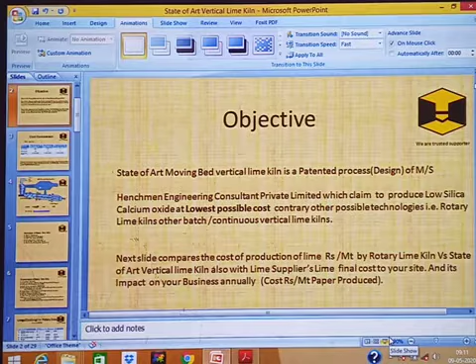Here is the cost comparison of lime produced by three different technologies. If you are producing lime by your own rotary lime kiln, the cost of production will be 11,606 rupees. If you are purchasing from a supplier it will cost 6,550 rupees. And if you are producing lime by the state of art moving bed vertical lime kiln, it will cost you only 2,515 rupees.

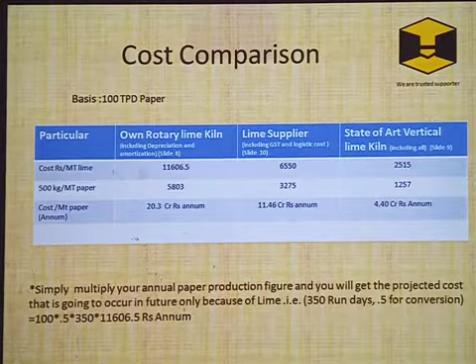So we have made some approximate projections for 100 ton per day paper production. We all know that every ton of paper production requires 500 kg of lime. So the cost contribution in paper manufacturing due to lime, by rotary lime kiln, will be 5,803 rupees, by supplier's lime it will be 3,275 rupees, and by state of art vertical lime kiln it will be only 1,257 rupees.

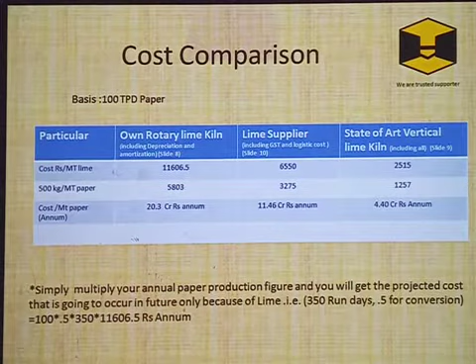So annually, a paper mill producing 100 ton paper per day will cost 20.3 crore rupees due to lime only, using rotary kiln lime. And if using supplier's lime, it will be 11.46 crore, and by state of art vertical lime kiln it will be 4.40 crore. There is a huge difference in the cost by all the three lime kilns.

A rotary lime kiln looks like this. Here is the old version, and it is popular since the last 50 years. But we are not going to discuss too much about rotary lime kiln operation, heat losses through radiation or flue gases. If you want to know all the losses and why it is costing so much, you should go through our video on the channel linked here.

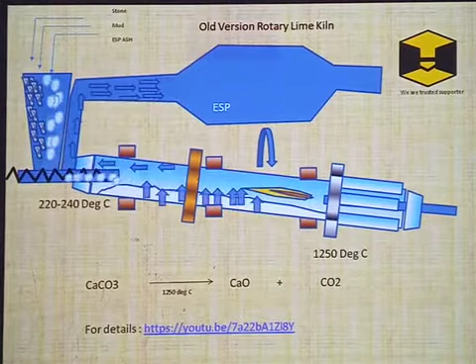Here is the costing part. In rotary lime kiln, basically there are two types of makeup: one is limestone, one is purchased lime. Some mills use both types of makeup simultaneously. Every ton of lime requires 0.1 metric ton of makeup lime as limestone, and purchased lime requires 0.33 ton per metric ton of lime.

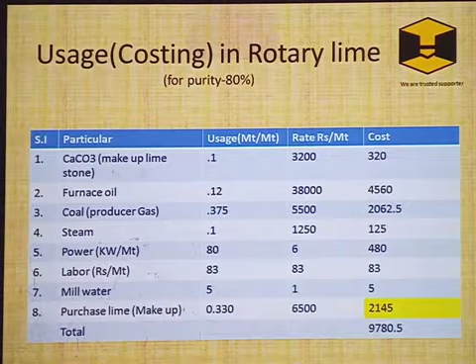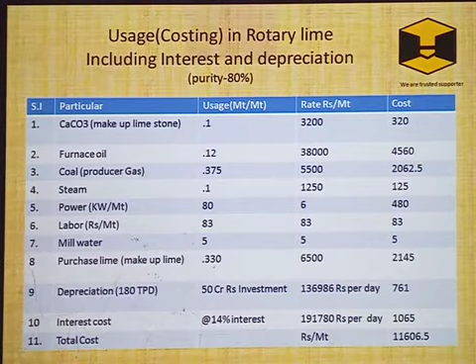So the costing becomes totally 9,780 rupees, and mind that this cost is without any depreciation and interest. So if one mill has installed a 180 ton per day lime kiln, it has invested 50 crore rupees, whose depreciation becomes 761 rupees per metric ton. Similarly, interest cost is 1,065 rupees. So the costing becomes 11,606 rupees per metric ton of lime produced.

Here the supplier lime kiln uses. Suppliers are ready to sell their lime at the cost of 3,800 rupees, and including GST it becomes 4,000, and after logistic cost to your mill it becomes 6,550 rupees. It may vary by 100 or 200 rupees, but it will be near about the same. So why they are costing only 3,800 rupees, we have to study this more precisely and wisely.

Lime suppliers usually erect their lime kiln proximate to raw material so that they can enjoy bulk purchasing of raw material. So producing 80% purity lime, they require only 1.55 metric ton of limestone per metric ton of lime produced, and theoretical energy required is only 3.1 gigajoule per metric ton. It must also be noted that the lime they are utilizing is 99% dry as well as 99% pure. So theoretical energy is 3.1 gigajoule, but typically it is around 4. This means they are using coal at 226 kg per metric ton, which amounts to 1,130 rupees. So overall the cost becomes 1,951 rupees, which is very low.

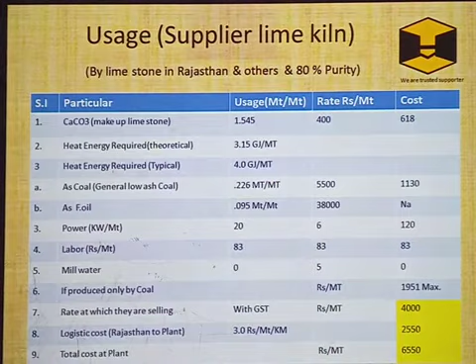So we will discuss this in the later slide. Let's see the uses of all the things in the state of art vertical lime kiln. State of art vertical lime kiln claims to produce 85% purity lime at the lowest possible cost.

So makeup lime requirement will be 0.2 ton per metric ton, and heat energy theoretically required will be 3.15 gigajoule per metric ton, but typically it requires 4.2 gigajoule per metric ton, which means 250 kg of coal as producer gas per metric ton.

There is also an option to produce this lime by furnace oil, but furnace oil itself is a costly item, which makes the whole process costly. So lime will be produced only through the producer gas and the tar oils or other cheapest available fuels.

So for combusting this producer gas, state of art vertical lime kiln requires compressed air or oxygen at least 93% pure. If compressed air is used, then the cost of production will be 2515 rupees, and if it is produced by oxygen, it will be 750 rupees. So overall cost of the lime produced by compressed air will be 2515, and if produced by oxygen it will be 2968.

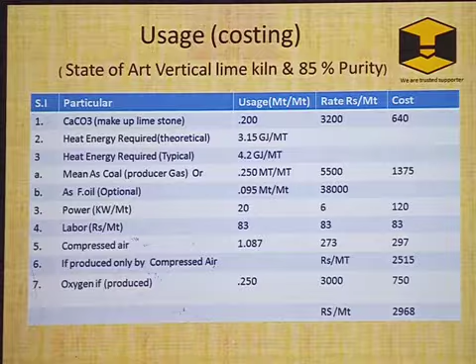In either case, you will see the cost of production is less than 3000 rupees, which also looks attractive. Here is the heat efficiency of rotary lime kiln. Every metric ton of lime produced in a rotary lime kiln requires 380 kg coal along with 120 kg per metric ton furnace oil. So total input is 11.74, and efficiency is 34.07, which is very low. But efficiency in rotary lime kiln can be seen as low as 20%.

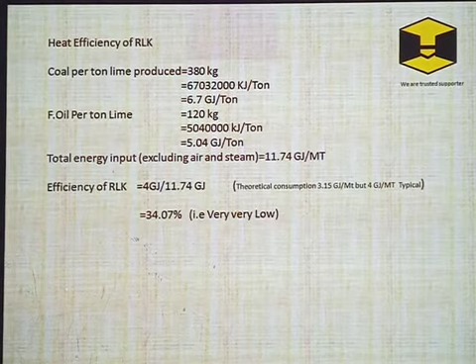So some questions come to our mind: why is there so much gap? Why is it so low efficiency? What is the radiation loss by the rotary lime kiln surfaces? What are the losses with the flue gases? What to do to get high mud dryness? What to do to get high product lime purity? Is there any idea to have a proper lime mud contact?

Radiation losses from rotary lime kiln surface can be as high as 4 gigajoule per metric ton lime produced, and if you will see, it is more than the theoretical energy required to produce a metric ton of lime. Similarly, heat losses through the flue gas can be as high as 3.8 gigajoule per metric ton, which is also more than the theoretical energy required to produce a metric ton of lime.

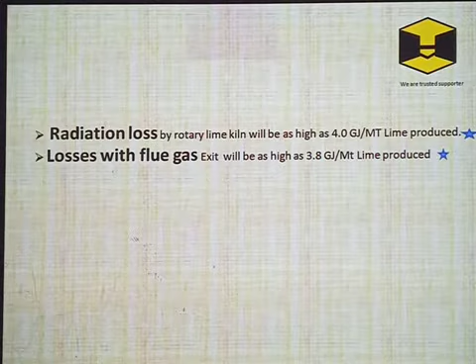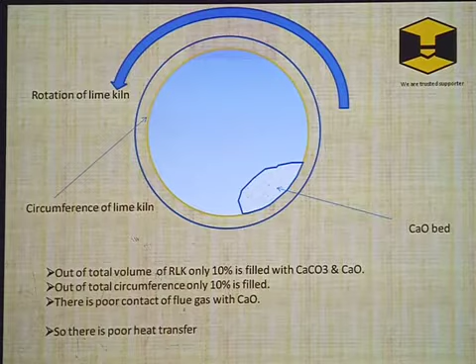A rotary kiln could look like this. If you will see, only 10% of the total volume is occupied by the lime bed or limestone bed.

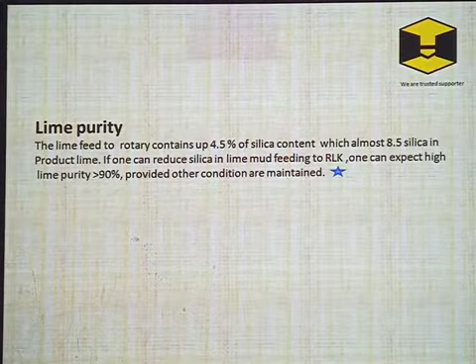Lime purity totally depends upon the calcium carbonate availability in the raw material. If a raw material has silica more than 4.5%, you cannot expect lime purity more than 90%. So we have to reduce the silica content, which is done by the state of art vertical lime kiln.

So after studying so much, we come to one point: is there any solution to all the problems discussed above? Yes, definitely there is. State of art vertical lime kiln is designed to do so for you.

Radiation loss and flue gas heat losses are curbed to a greater extent in this, which means first the lime sludge produced will be desilicated by a desanding process, and in turn this desilicated lime sludge will be formed into pellets and made dry for 10 days. Finally, when the 90% moisture is removed, it will be burned in the state of art vertical lime kiln by producer gas and compressed air.

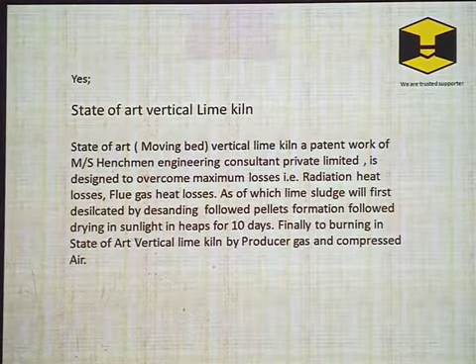The claim of the state of art vertical lime kiln: it claims to deliver high purity, low silica calcium oxide at the lowest possible cost, and claims to be highly energy efficient compared to other conventional vertical batch kilns. It utilizes fuel like producer gas, methanol, furnace oil, natural gas, tar oil, and all are mounted on the same burner. For atomizing, it utilizes 95% oxygen or compressed air.

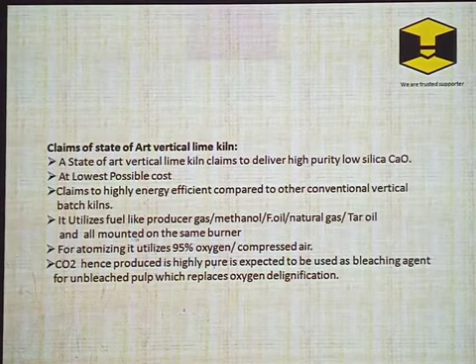If it is utilizing oxygen, then the CO2 hence produced will be highly pure and can be used as a bleaching agent, and it can replace oxygen delignification, which is also a costly process. So this is one of the benefits a paper mill can reap here by byproduct as well.

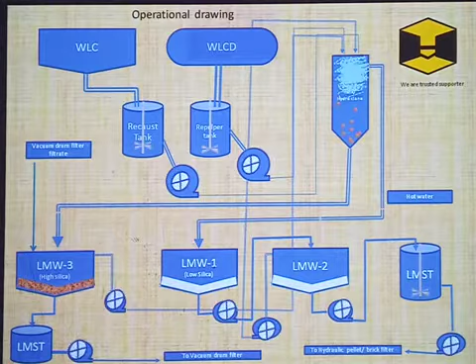So here is the operational drawing: all the lime sludge by white liquor clarifier, or WLCD, is fed to a hydrocyclone, where the high silica lime mud and low silica lime mud is separated as shown here. After removing the silica, the lime mud is converted into pellets in a hydraulic press filter.

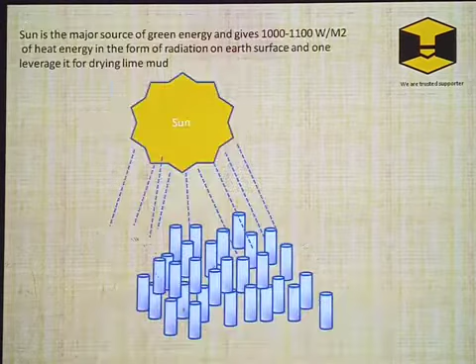Sun is the major source of green energy, and has been liberating its energy for many years, and for millions more years it will continue to do so. It has been noted that approximately 1000 to 1100 watts per meter square of heat energy is radiating.

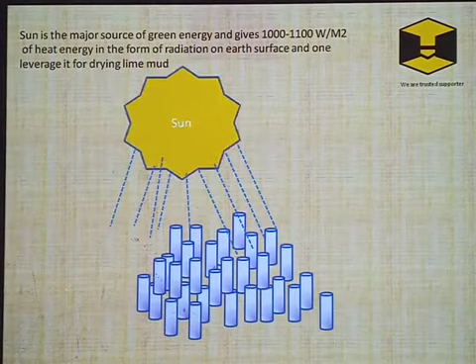So here the pellet is dried for 10 days till 90% moisture is removed. After drying, all the pellet is brought down to the state of art moving vertical lime kiln.

Which is fed to a rotary airlock feeder as shown here. A state of art vertical lime kiln is usually as long as 20 meters and has a diameter of 8 meters. There is an opening of 2 meters for passage of lime pellet counter-currently.

So there is very little chance of flue gas escaping without transferring its heat to the pellets. All the flue gases pass through the pellet space only, so very few flue gases escape through other openings.

Here a disk rotates either clockwise or anti-clockwise at an RPM of 3 to 6, and a gas burner burns the lime over the disk.

There are basically two processes of producing calcium oxide: one is high heat low retention time, and another is low heat high retention time. In the state of art vertical lime kiln, you have flexibility of retention time, as you can increase your disk speed using VFDs RPM.

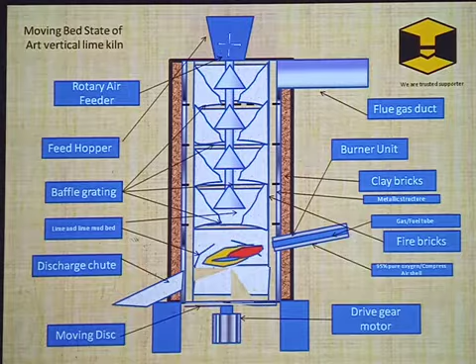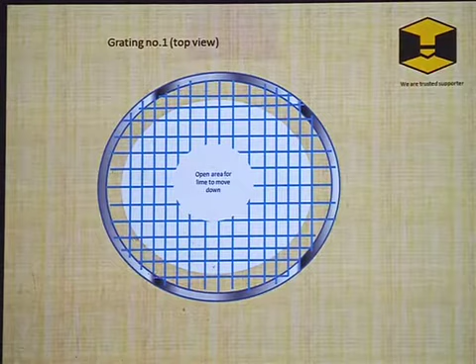This is baffle number one at the top, shown in grating form, so that all the pellets stay here and form a mountain-like shape. As the slope of the repose increases, it falls down to the next baffle. Here is baffle number 2, baffle number 3, and baffle number 4.

Here is the importance: gone are the days when people were leveraging economics by purchasing low cost lime, and after using it they were disposing of it in landfills, which led to soil pollution. Because the Central Pollution Board has stricter norms now, you cannot dispose of even a single kg of lime in the future.

The state of art vertical lime kiln requires very low capital investment, that is 0.027 crore rupees per metric ton of lime, whereas a rotary lime kiln requires high capital investment, approximately 0.27 crore per metric ton. So capital investment for installation of the state of art vertical lime kiln is 10 times lower compared to a rotary lime kiln.

Emission is also very low. Due to reduced fuel oil consumption, it is only 1.2 metric ton per metric ton of lime produced.

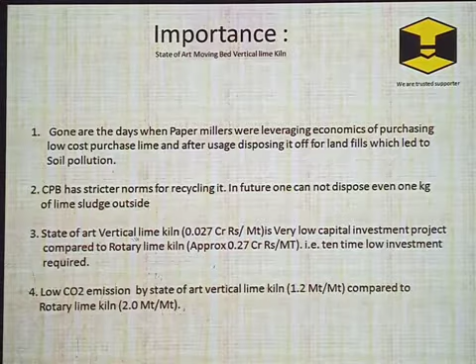A state of art vertical lime kiln gives variable retention time, which is not possible in a rotary lime kiln. It gives more than 24-hour retention time. By simply increasing the disk speed, you can have variable retention time without much impact on the purity of the lime, which is not possible in a rotary lime kiln.

Every paper mill requires 450 kg of lime to produce a metric ton of unbleached pulp, and 500 kg of lime to produce a metric ton of paper. So 5,803 rupees is the cost contribution due to lime only in the manufacturing of paper by rotary lime kiln, whereas by state of art vertical lime kiln it is only 1,257.

A rotary lime kiln never gives its payback, because the lime it produces is very costly compared to the other two technologies. Emission is very low in the state of art vertical lime kiln.

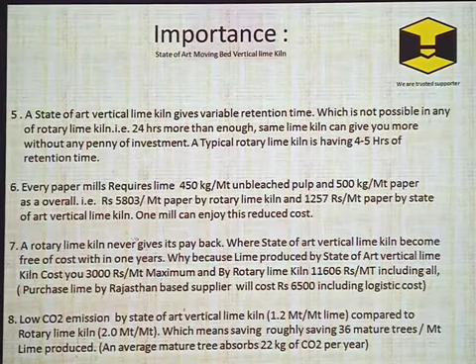Friends, this was all about the state of art vertical lime kiln.

So if you see, due to the pandemic, most paper mills have enhanced their capacity to a greater extent, and right now they are not able to produce their paper to the optimum level. So the cost of production of paper has skyrocketed. So it is time we should think and ponder about how to reduce the cost.

My suggestion is that this time can be seen as an opportunity. So we must think and do everything to make the cost as low as possible.